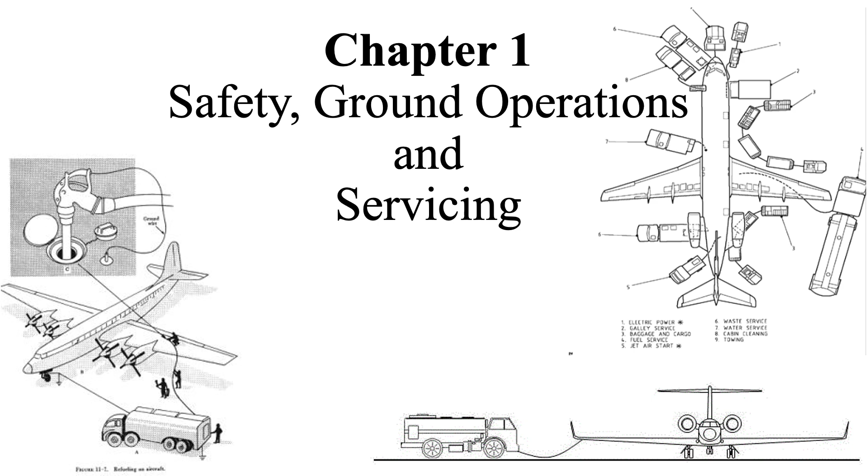When an aircraft is on the tarmac, only rated pilots and qualified airframe and power plant technicians are authorized to start, run up, and taxi aircraft. All taxiing operations are performed in accordance with applicable local regulations. An aircraft maintenance technician must be familiar with all the cabin systems.

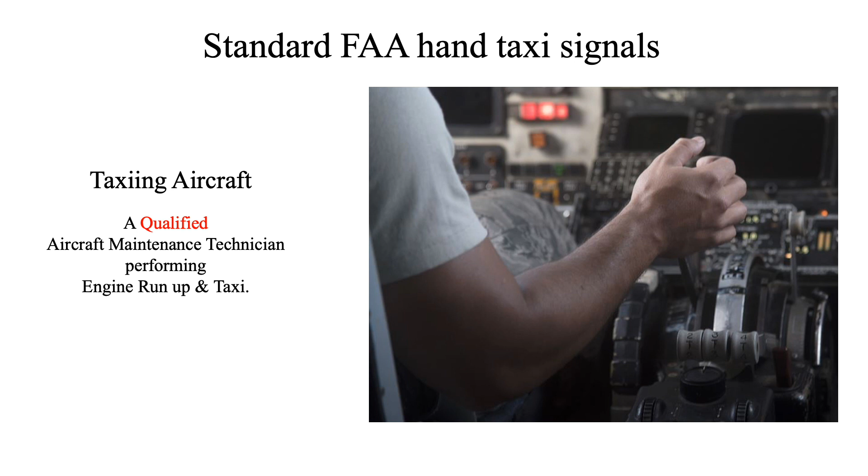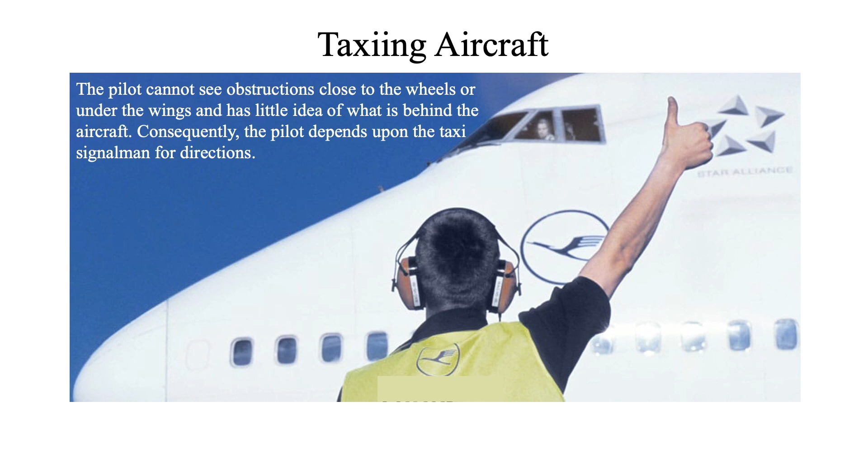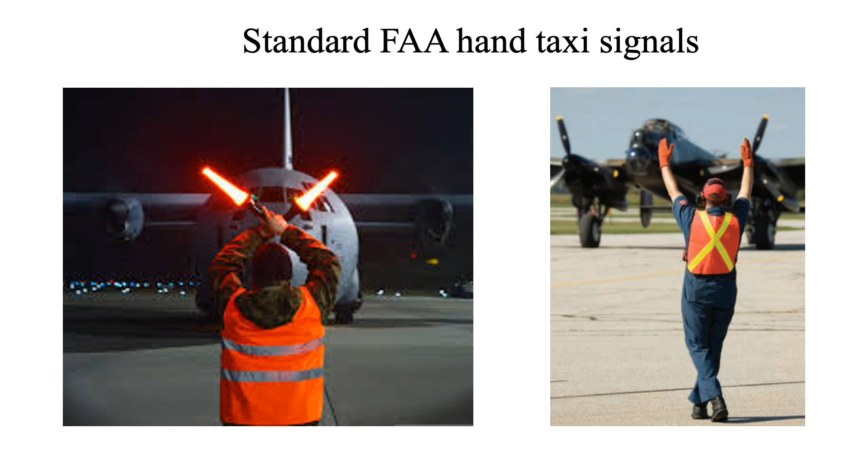The pilot can't see obstructions close to the wheels or under the wings and has little idea of what is behind the aircraft. Consequently, the pilot depends upon the taxi signalman for directions. A taxi signalman can assist the pilot around the flight line. In some aircraft configurations, the pilot's vision is obstructed while on the ground. The following section provides detailed instructions on taxi signals and related taxi instructions.

The pilot receiving the signals is always some distance away and often looks out and down from a difficult angle. The signalman's hands must be kept well separated, and signals are to be over-exaggerated rather than risk making indistinct signals. If there's any doubt about a signal, or if the pilot does not appear to be following the signals, use the stop sign and begin the series of signals again.

The signalman must glance behind himself or herself, often when walking backwards, to prevent walking into a propeller or tripping over a chock, fire bottle, tie-down line, or other obstruction.

The standard position of a signalman is slightly ahead of and in line with the aircraft's left wingtip. As the signalman faces the aircraft, the nose of the aircraft is on the left. This is an international standard practice. The signalman must stay far enough ahead of the wingtip to remain in the pilot's field of vision. If the signalman can see the pilot's eyes, the pilot can see the signals.

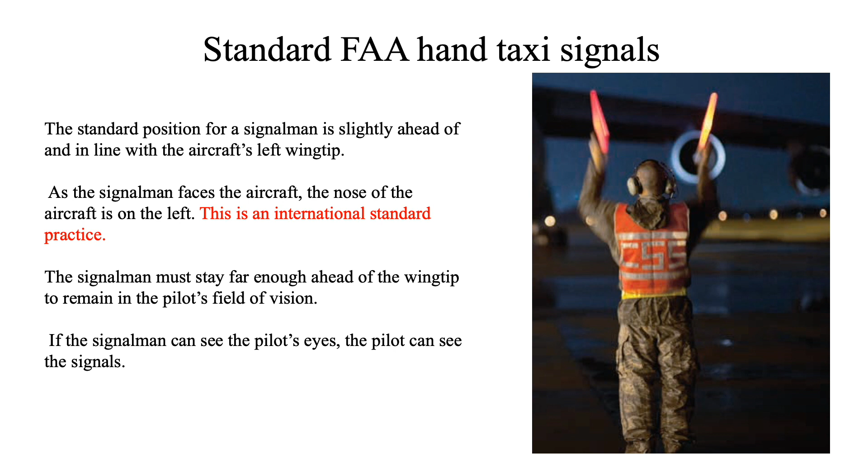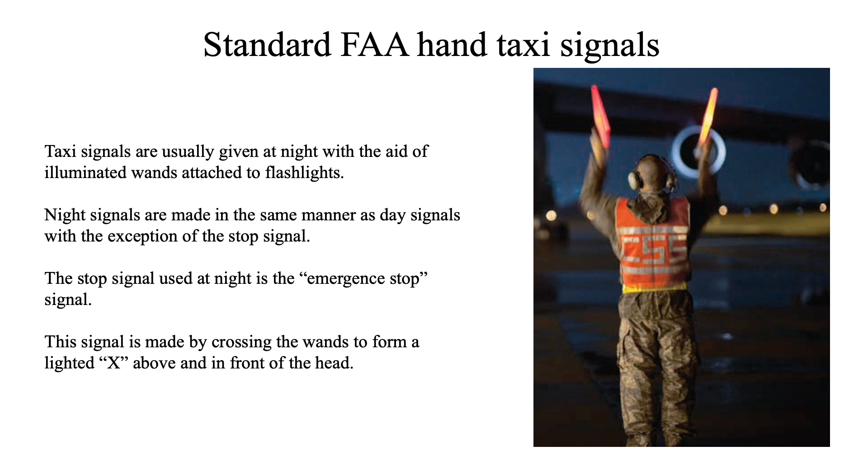At night, taxi signals are given with the aid of illuminated wands attached to flashlights. Night signals are made in the same manner as day signals, with the exception of the stop signal. The stop signal used at night is the emergency stop signal. This signal is made by crossing the wands to form a lighted X above and in front of the head.

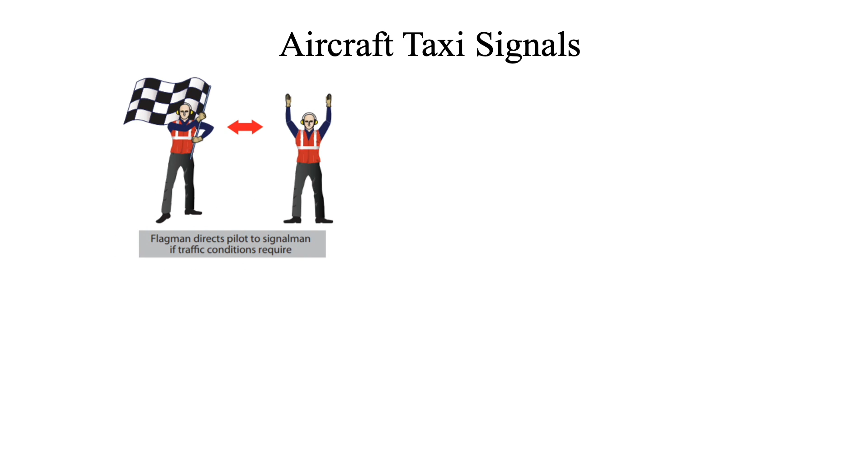The following section provides detailed instructions on taxi signals and related taxi instructions. The signals shown in this slide represent a minimum number of the most commonly used signals. Flagman directs pilot to signalman if traffic conditions require. Signalman's position, signalman directs towing. Stop. Come ahead. Emergency stop. Cut engines.

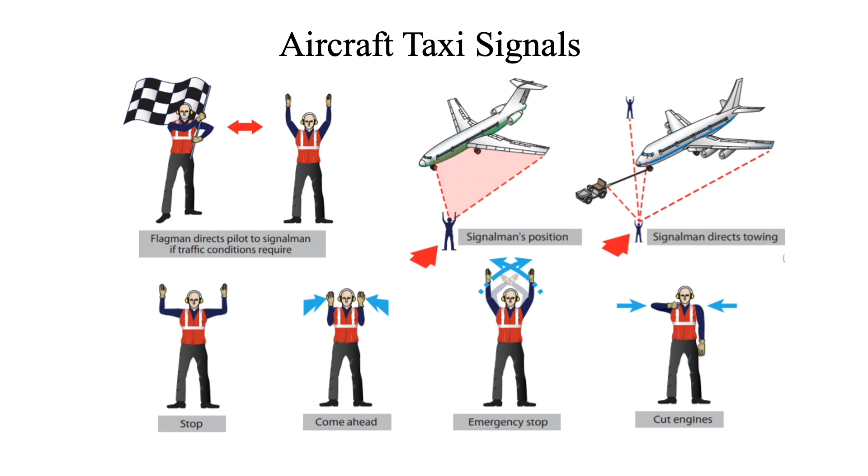These signals are published in the FAA Aeronautical Information Manual. There are other standard signals, so whether this set of signals or a modified set is used is not the most important factor, as long as each flight operational center uses a suitable agreed-upon set of signals. The taxi signals to be used must be studied until the taxi signalman can execute them clearly and precisely. The signals are to be given in a way that the pilot cannot confuse their meaning.

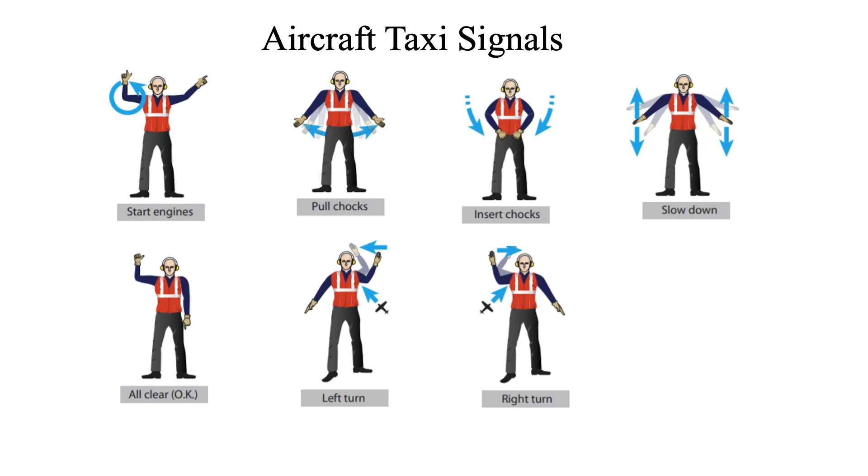Start engines. Pull chocks. Insert chocks. Slow down. All clear. Left turn. Right turn. Night operation. These next slides illustrate some of the most commonly used helicopter operating signals.

Start engine. Engage rotor. Stop rotor. Stop. Move back, move forward, move right, move left.

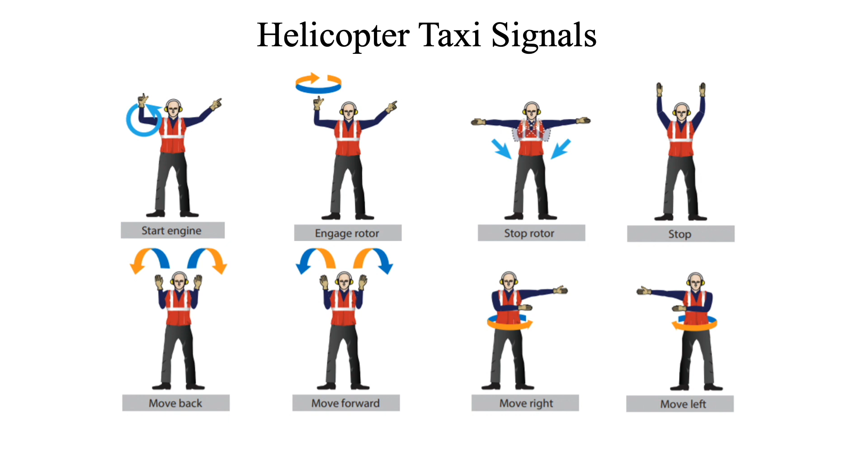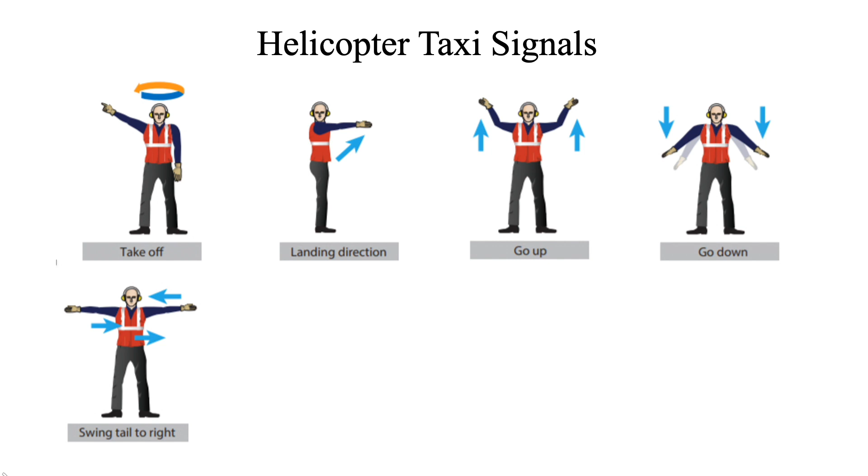Most helicopter operation signals are different from airplane signals. Takeoff, landing direction, go up, go down, swing tail to right, swing tail to left.

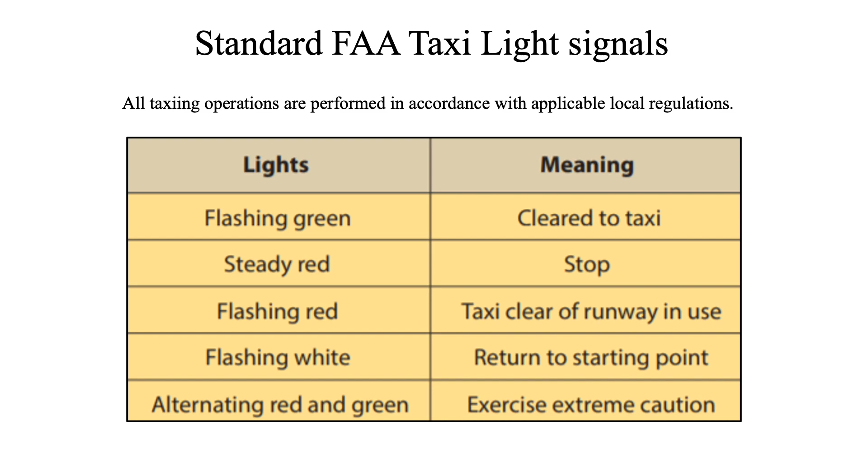Here are the standard FAA taxi light signals used by control towers to control and expedite the taxiing of aircraft. All taxiing operations are performed in accordance with applicable local regulations. The International Air Transport Association's Ground Operations Manual sets the safety standards for ground support equipment at airports to ensure ground operation activities are safely accomplished.

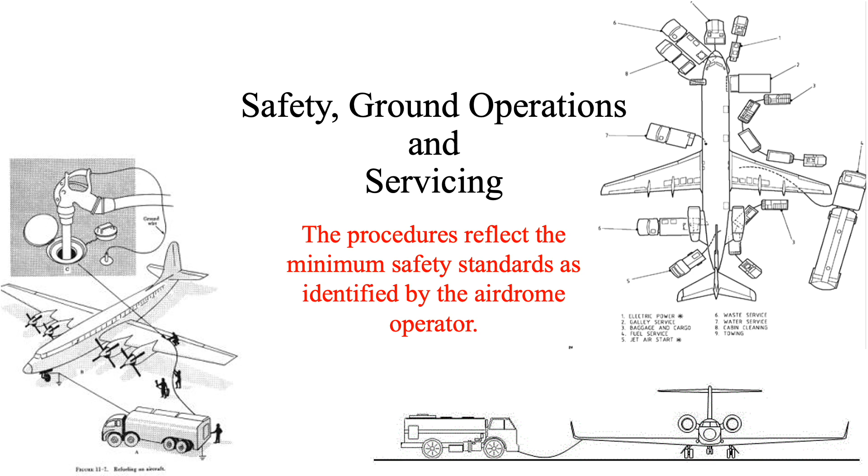Next, we'll look at safety practices, ground operations, and servicing. In the aviation field, FOD is the acronym for Foreign Object Damages. Foreign object damage is any damage to aircraft, personnel, or equipment caused by any loose object.

FOD can also be used to refer to any object, live or not, located in an inappropriate location in the airport environment that has the capacity to injure airport or air carrier personnel and damage aircraft. Some examples are coins, nuts, bolts, tools, cans, safety wires, concrete, gravel, wooden skids, plastic sheets, cartons, netting, luggage wheels and handles, paperwork, birds.

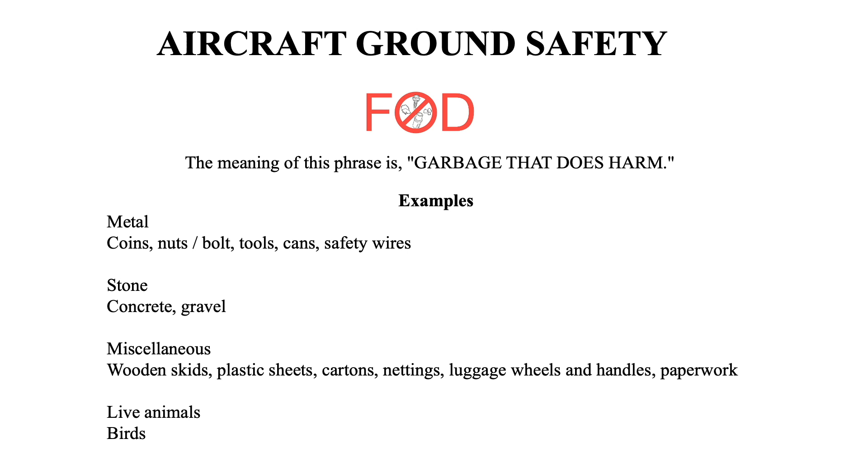FOD can damage numerous aircraft components, engines, control systems, power supplies, etc. Pick up any debris and place in appropriate area or dispose of properly. Aircraft have been damaged and destroyed due to FOD while operating on the ground and in flight.

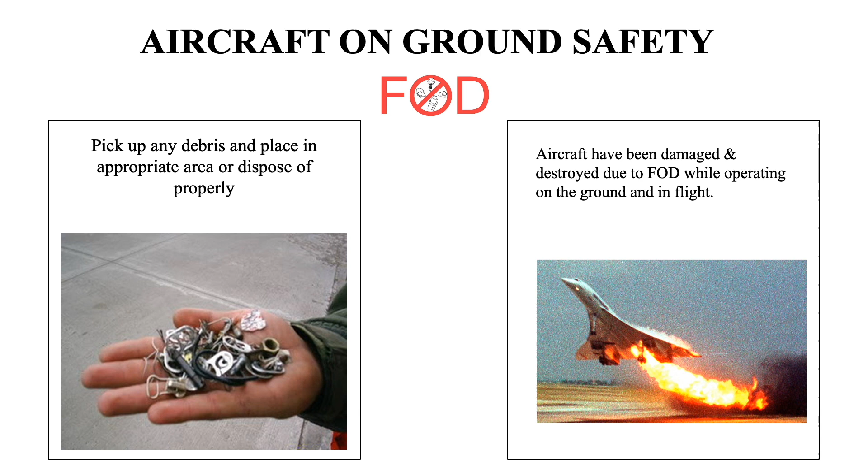This happened with Air France Flight 4590 on July 25, 2000. The Concorde suffered a fatal, tragic takeoff after an FOD on the runway hit and punctured a fuel tank and burst into flames. The aircraft crashed, resulting in the death of 113 souls. As you can see, FOD is involved in many economic losses in engines, tires, and aircraft, and tragic accidents.

These are the recommendations for ground operations regarding FOD. The workfloor area around the aircraft must be kept clean of FOD at all times. The airstrip, ramp, and airways of the aircraft must be kept clean of FOD. The areas used to perform engine run-ups must be kept clean of FOD. No person is allowed to leave a messy area unattended. The entire work area should be cleaned immediately before and after completing a task.

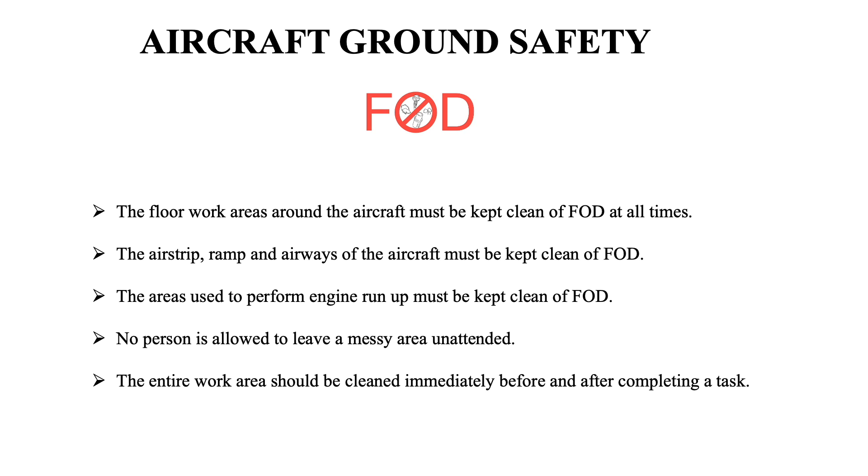Any tool left on an aircraft is a potential FOD. For safety, there must be tool control. Tool control strictly enforced. All tools must be inventoried. Inventory is subject to periodic inspection by aircraft maintenance and/or quality assurance personnel. Report any lost tool to aircraft maintenance and/or quality assurance personnel. A lost tool can down an aircraft until found.

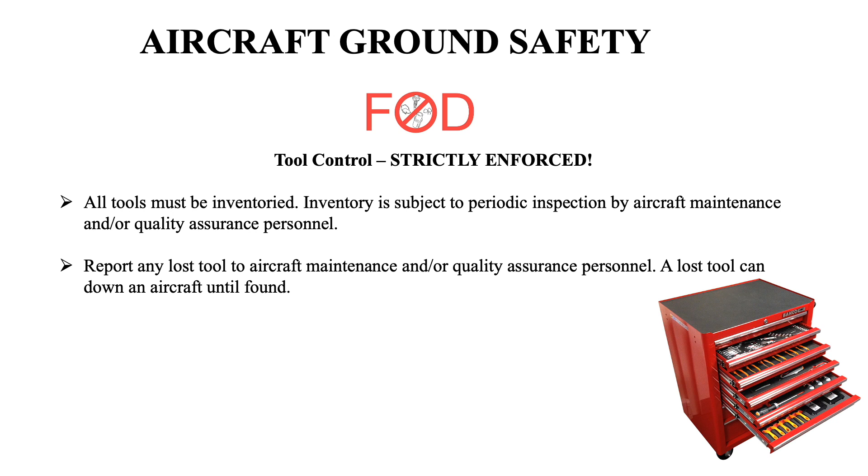Personal protective equipment is a mandatory type of equipment that employees have to use or wear to protect themselves from the risks in their work environment. There are various hazards at an airport, so this type of equipment is highly important. Airport maintenance crews and ramp personnel should be equipped with hearing protection, hand protection, and foot protection.

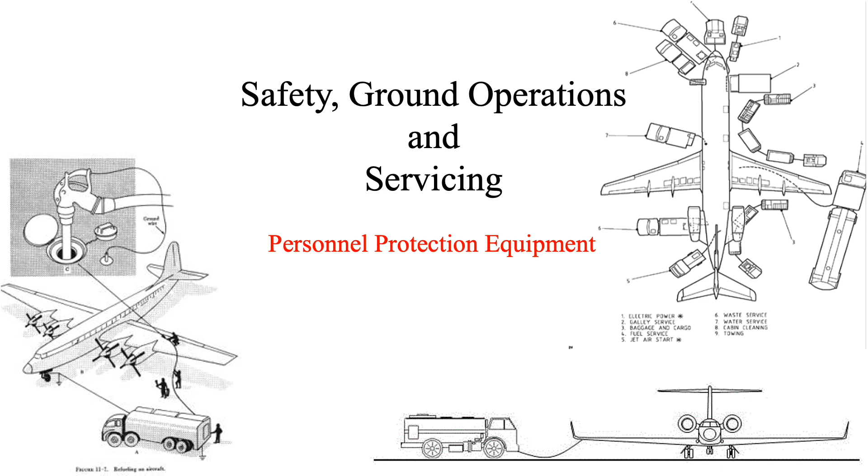This concludes our first video on safety, ground operations, and servicing. In the next video, we will cover ground support equipment.